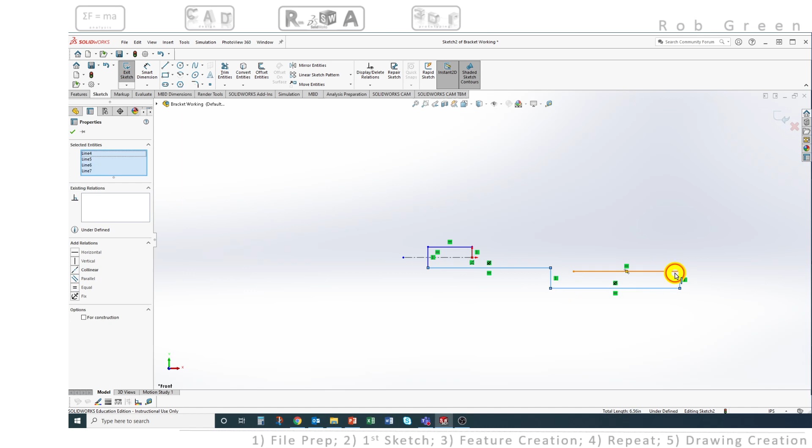So I'm going to select, and by the way, I press and hold Control and continue selecting. And so I have all of these lines selected. I'm now going to select my mirror command, click into this box that tells SolidWorks what is the line that I want to use as my mirroring blade. Select the center line. I get a yellow preview. I'll say, yes, that is what I want.

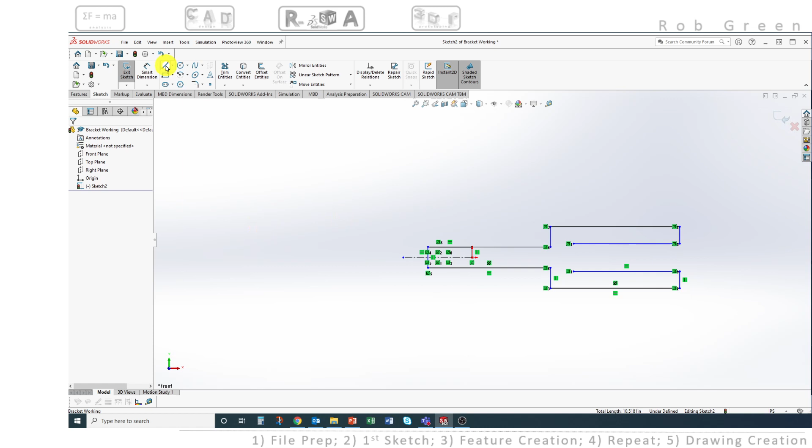And I need to simply then draw in this last line. And I can see that I get a gray preview. That's SolidWorks' feedback to me that mathematically there is an enclosed region, something that I should be able to expect to be able to extrude once I exit this sketch.

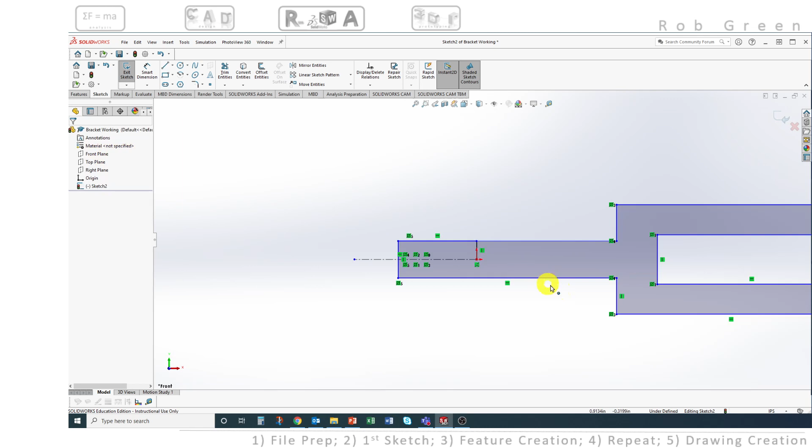Got a couple artifacts in here that I did off camera. And so I believe that when I exit this sketch and I make an attempt to extrude this bracket 2 inches high, I'm going to get an error. But I'm going to go ahead and do this anyway and then come back into this sketch and kind of highlight some of the sketching issues that create 3D feature errors.

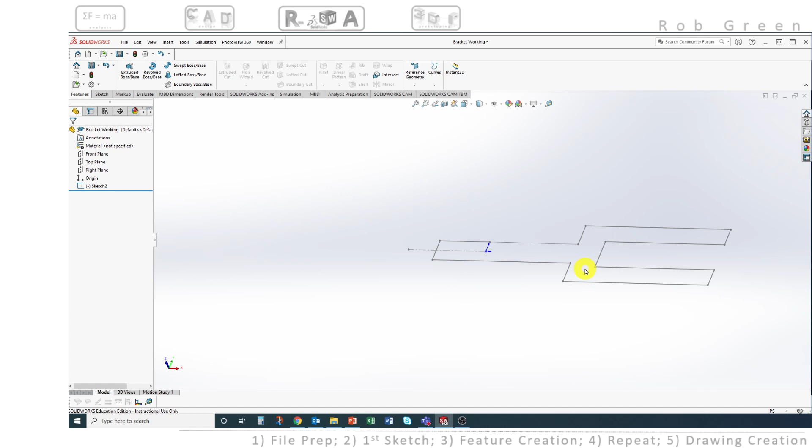So I'm going to exit the sketch. I always tend to rotate my view so that I'm looking at something off axis, not purely orthographic, so that I can see all three dimensions or all three axes. So over in my history tree, I'm going to select Sketch 2, letting SolidWorks know that's what I want to work on. And here's what I want to do to Sketch 2. So select Sketch 2, extrude base or boss.

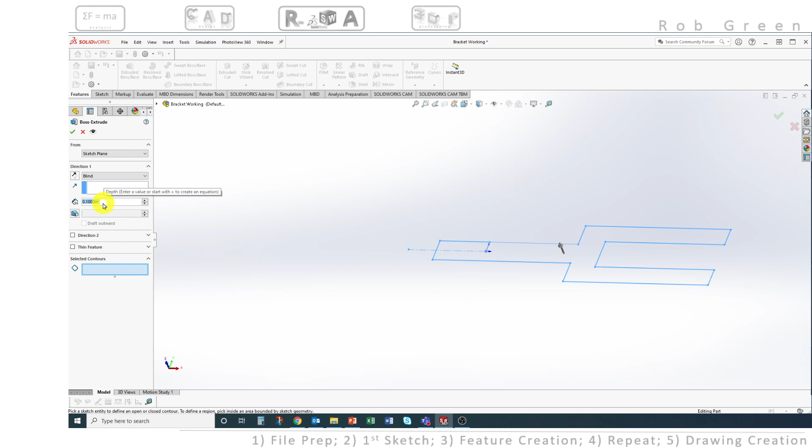And if this was going to be successful, I should see a yellow or golden preview coming up 0.1 inches. And I see no preview. That's SolidWorks' feedback to me that there's some kind of problem with the sketch that I'm not able to overcome. So I can't complete this command. I'm going to exit, right-click on the sketch, and now this top left icon is the command that says I want to edit my first existing sketch. So I'll use this edit sketch.

I'm back now editing. If I zoom on the left end, remember the first line we drew was from the origin out to the outside. And SolidWorks doesn't know what to do with this line, right? It's in the enclosed region. The software is trying to figure out how does it extrude this shape and how does it include that line in the extruded shape.

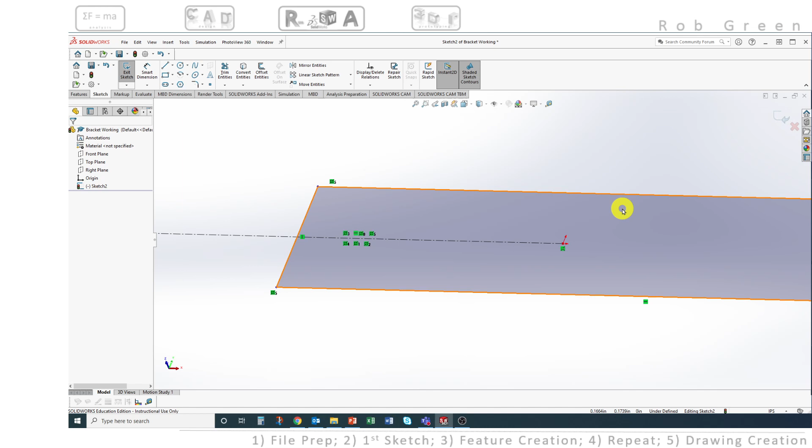I select it and delete it, and I'm still going to have an error because I started here, went out to the edge, and back 1 inch. I have two lines on top of each other. SolidWorks can't deal with that level of complexity either. It doesn't know what to do with this short 1 inch line relative to all the other lines. So I'm going to use a window selection, delete that little piece, and notice my gray preview is still there. So just as a heads up, it can be a bit of a challenge to debug sketches when we're not sure what the error is.

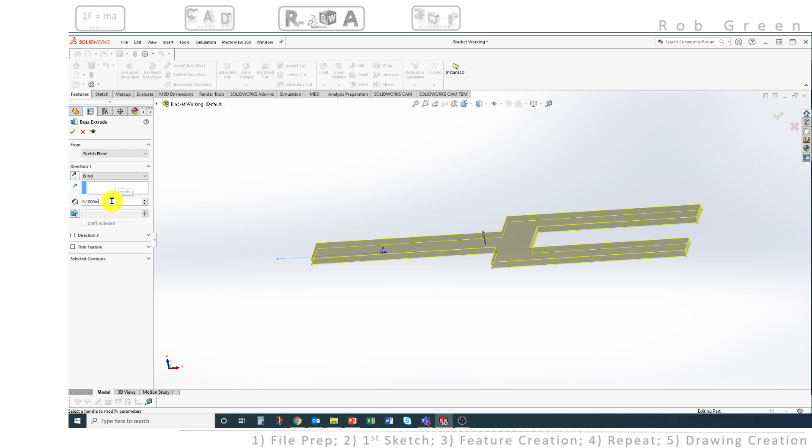So I'm going to go ahead and exit this sketch, select Sketch 2, extrude this boss, and I get that yellow preview that I was talking about. So here I want this to be 2 inches tall. And we have a good start on that bracket that we need to draw. So the next step that we're going to do is put a hole into this left side, and then we need to put a hole into the right side. In fact, I think what I will do as part of a demonstration is I'm going to put both holes into the same sketch.

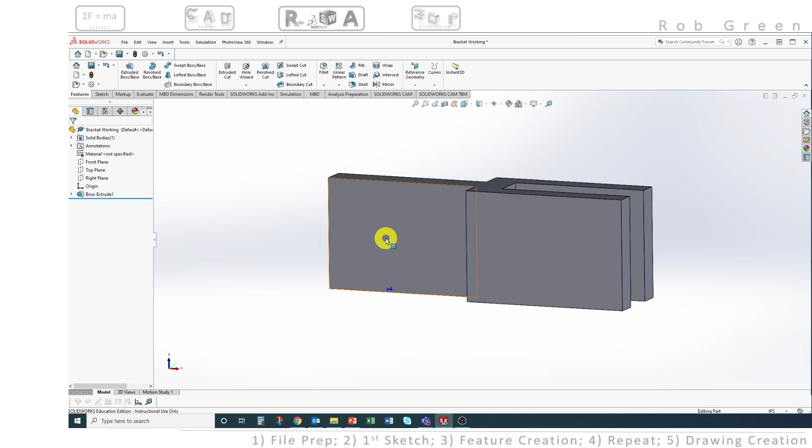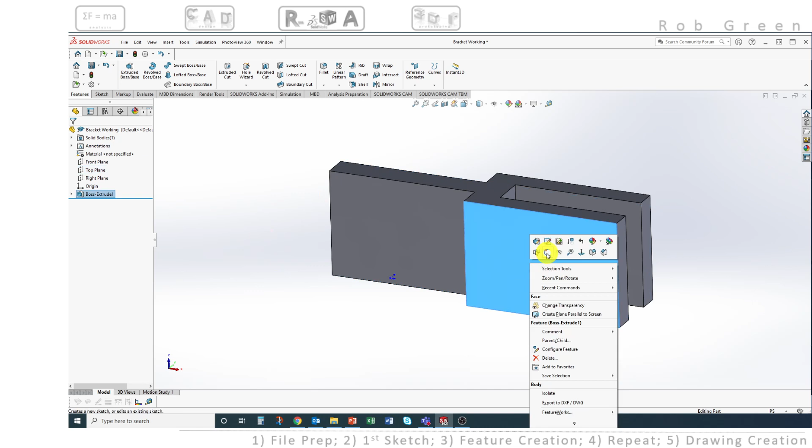So our first sketch we chose to draw on the front plane. I could choose to draw my holes on this what's called top plane. I also can select an existing surface. I then right click and I can say that I want to start a new sketch drawing on the plane that this surface represents. So that's what I'm going to execute.

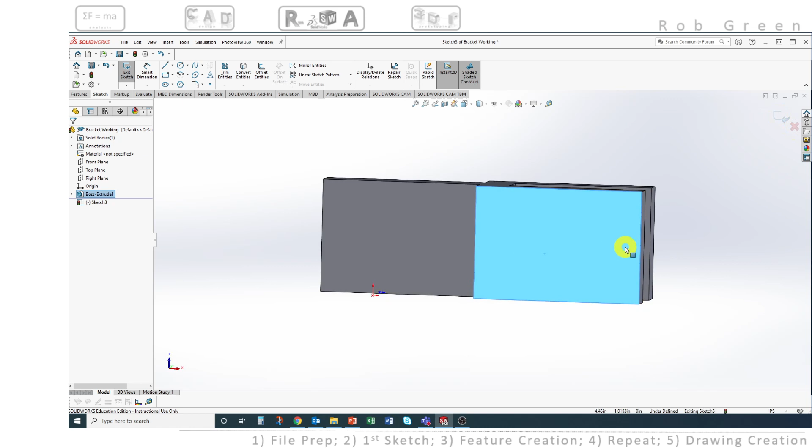Start a new sketch. Here's my sketch origin. I see my sketch icons. And I'm going to put this circle in that I want to be a hole. And to start with, it's a 0.85 inch diameter. So I'm going to put that in. And I want it to be 1 inch in from the end of this bracket. So I just clicked out in space to get rid of that blue.

So what I'm going to do is I'm going to draw what's called a reference line from the midpoint of this edge over. And to get a line instead of an edge, I have this option that says convert an existing 3D edge into a line that's in my sketch. So I'm going to execute this command and select this near edge.

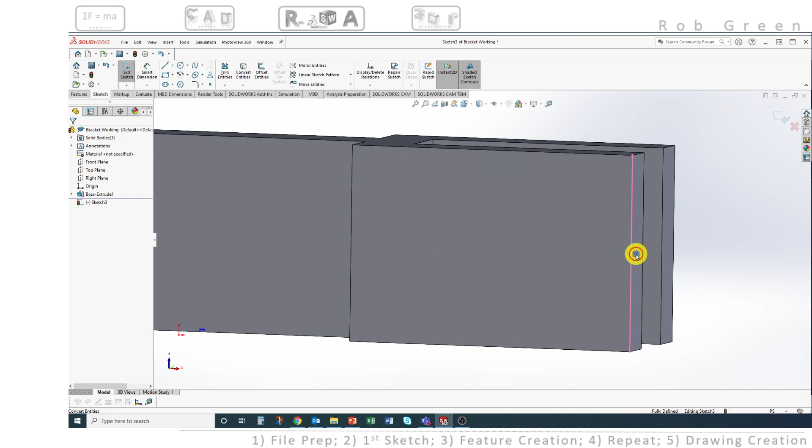I'll click the green check mark, and hopefully on the screen here you can see that that edge has changed a little bit. It's dark black. There's actually now a line in the sketch. We'll talk about these later, but I'm going to delete this little green box, and I'm going to draw a center line. I'm going to make sure here in SolidWorks I get a snap to the center of this line, and I'm going to come left and enter my length of 1 inch.

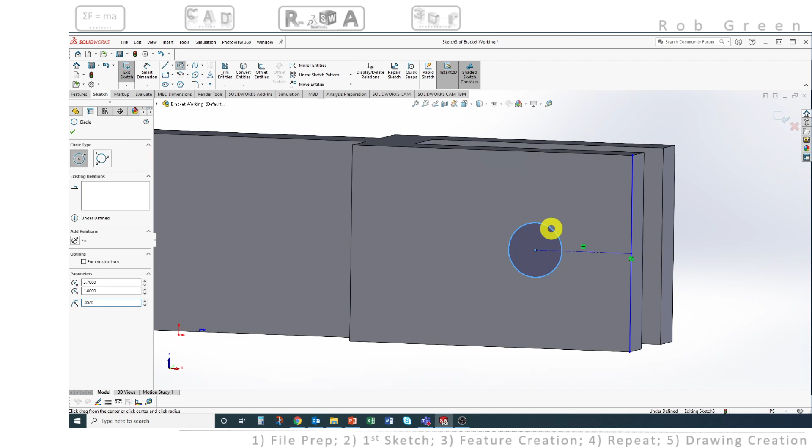So now I know the hole that I want is going to be right at the end point of that line. I'll draw a circle, and I want the diameter of that circle to be 0.85, so I can enter 0.85 divided by 2, because SolidWorks is asking me for the radius. That's the correct size. And let's work on the other hole as well. It's 1 inch from the right.

I'm going to suggest that we want to think about a workflow where we reuse geometry. So I'm going to select this circle and use a copy command. And I'm going to tell SolidWorks here that I want to copy it a specific dimension in X and Y. So X is my red arrow. I can see that X is here. So I want to copy this thing to the left. So I'm going to copy a value.

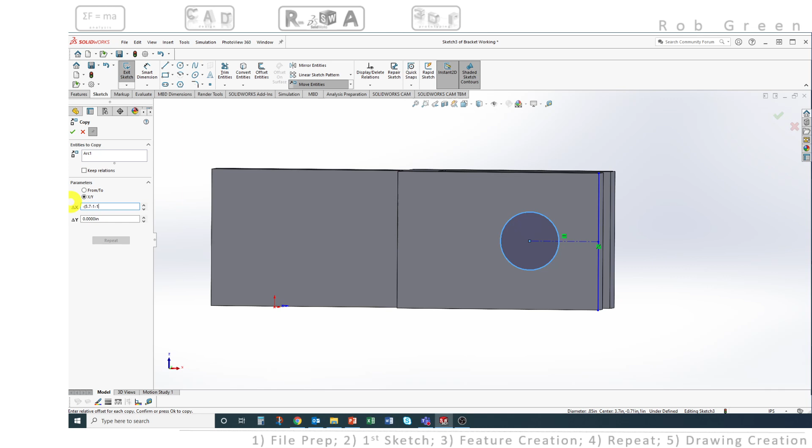And again, here is just a great example of full calculator. I want it to go left, so I'm going to put a minus sign, and I've got to do some math in here, so I'm going to use parentheses. I want to go left 5.7 inches minus 1 inch minus 1 inch on the left. Close my parentheses, and that's the location of the hole on the left.

The size now is incorrect, so I hit escape a couple times, and here, after it's already drawn, I can change the radius. I want my through hole to be a diameter 0.65. I enter 0.65 divided by 2. It just saves me having to think through that math in my head. And the hole gets a little bit smaller, and I'm going to exit this sketch.

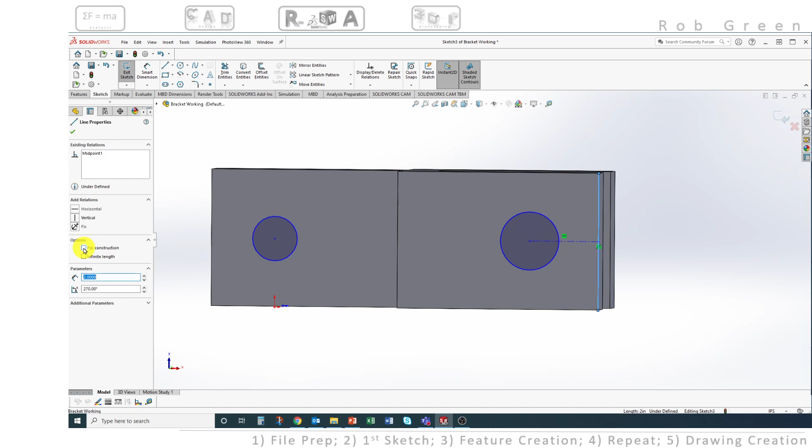And before I do, I think I need to change this last line away from solid to a type that is this centerline style. Once I've created an object, I can change it to centerline style by checking this box that says for construction. I do that, press the green check mark, and now if I zoom in, yeah, I just can't see it on my screen. You probably can't see it in the recording, that's for sure. But it is a midline or centerline style. So I will exit my sketch.

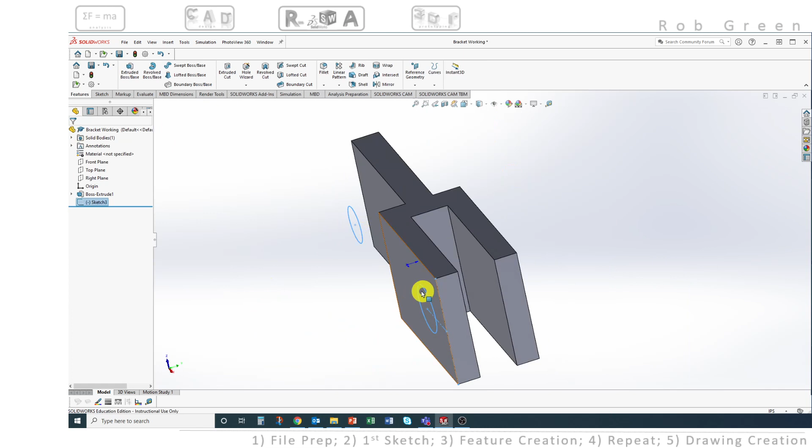Notice this sketch isn't out in the middle of the air. It's on this surface. So everything that I drew is on this outside edge surface. So I'm selecting sketch 3. I want to take geometry away. So this is the area that I'm going to be using. I will cut, or extrude cut. And notice this yellow preview goes all the way through the part.

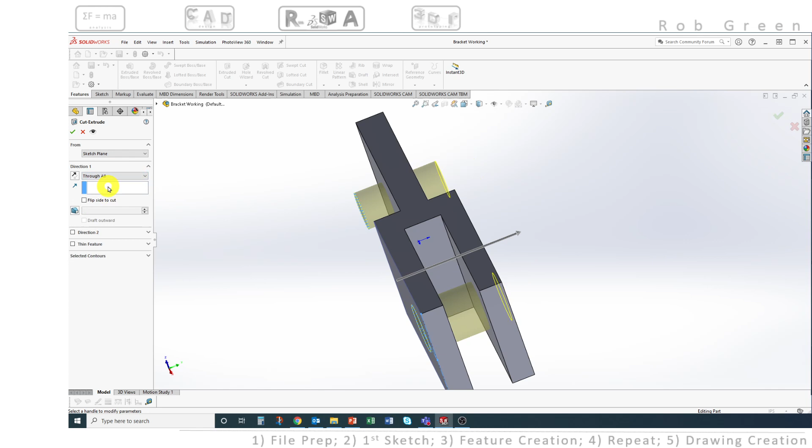I'm happy with that. I could just click the green check, but I'd like to highlight that I have options here. And in here, I can tell SolidWorks that I want to extrude this cut through all of the part. And notice what happened is the yellow preview now stops at this back edge. Well, that's as far as the part goes, so that's as far as the extruded cut goes. I click my green check mark, and I now have that bracket with holes in it.

And we've got 2 more steps to take to finish our geometry. And I'll close this section and we'll finish this part up in the next section of videos.